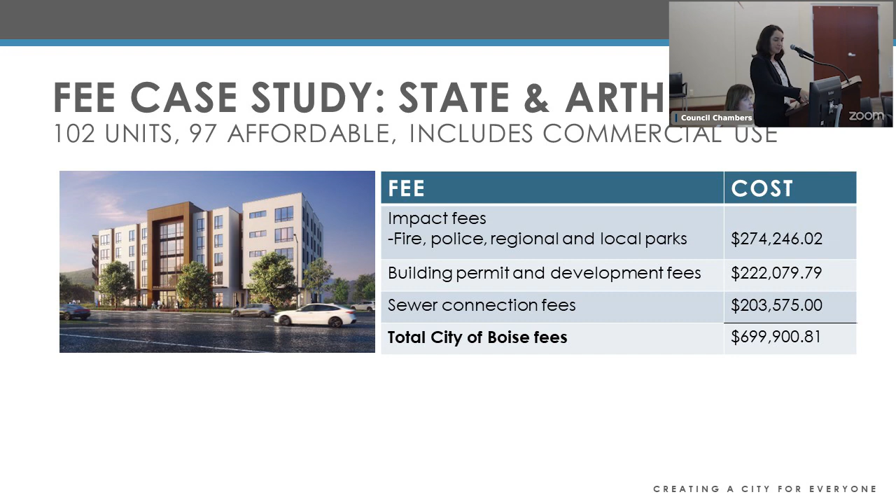So essentially what we have tried to devise here is a 2-tiered system with greater incentives associated with deeper levels of affordability. So we've got 2 categories of affordable housing projects. One is projects that meet the zoning code's affordability incentive criteria by having at least 25% of their units affordable at 80% AMI for rental, 120% AMI for homeownership.

So what we're essentially saying is, look, if you're meeting our zoning code affordability incentives, we can also offer you this short-term deferral on both your impact fees and your building permit and development fees, where we can defer them for 2 years. You can pay them at certificate of occupancy, and it addresses a little bit of that upfront pain.

The second tier is for more deeply affordable projects in which at least half of the units are affordable at 60% AMI or below for rental or 100% AMI or below for homeownership.

So for these more deeply affordable projects, they would be eligible for their building permit and development fees to be exempted altogether, meaning that there would be no expectation that they be paid back in the future. And with the ordinance change before you, those types of projects would also be eligible for a long-term deferral of their sewer connection fees, which we'll get into now.

So currently under city code, restaurants and breweries already have the ability to have their sewer connection fees deferred. This would just add affordable housing as an allowable category and would also include a repayment structure that's specific to the financing needs of those projects.

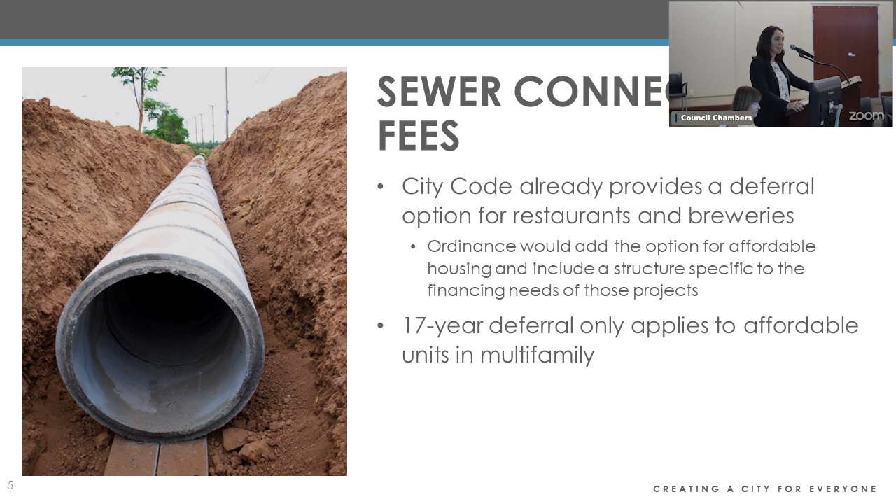Madam Mayor, first of all, Nikki, great job explaining the complicated thing without any slide assistance. You did wonderful. You had said something about folks being eligible for an exemption, and I was wondering if you could maybe just give us a snapshot of what that process would look like. Is it somebody who meets the requirements and then they apply for something, and then we have an objective way of saying yes, no? How does the eligibility work?

Mayor, Council President Hallyburton, yes, that's exactly how it would work. We would have very clear criteria spelled out in policy. And this is something we're excited about. There is a position within PDS, it's Joe Bruce, and his job is very much to work with folks who are trying to bring affordable housing online and to make sure they're aware of these incentives that are out there. Here's how we can get you through this application process, right? Here's what the criteria will be. And if you meet the criteria and you apply and we verify that you meet the criteria, then you would be able to get that exemption or deferral.

Perfect. That's how it would work.

Madam Mayor, not a question, but just a comment. I really appreciate the continued focus on trying to come up with creative solutions to ensure that we have affordable housing. We know the market forces right now across the nation, but here in Idaho and in Boise specifically are really putting a damper on our ability to make this happen. So I'm really just thankful that the team is continuing to look at the many different options we have in front of us. And I think that this is another one of those levers that we can pull that hopefully gets that kind of development here. Thank you.

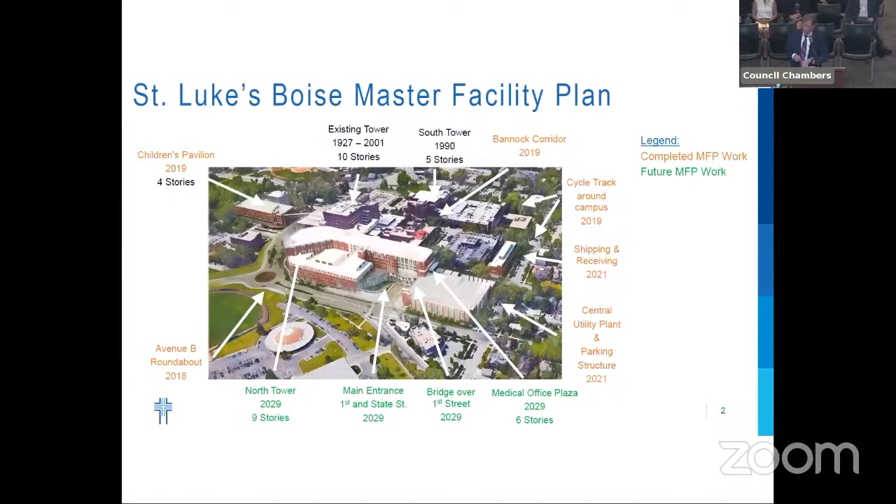I'll go to the next slide. Just for some macro context, it's important to share that St. Luke's Health System is Idaho's largest private employer with over 15,000 employees. We provide care at hospitals and clinics throughout Idaho and eastern Oregon. The medical center downtown is a tertiary referral hospital and the only children's hospital within the state of Idaho. We have 400 beds, 113 children's beds, and our beds have become often full. Annually, we admit over 21,000 patients, including 2,000 pediatric admissions from all areas of Idaho and beyond, for cancer services, cardiac services, and trauma care.

We average more than 100 patients per day in the emergency department. When the pediatric trauma service opened in 2022, we quickly saw an uptick of 9,000 pediatric trauma patients in 2022 alone. Ever more important in light of the bus incident back on August 1st, having these services locally in this community is a critical asset. In addition to providing healthcare services, St. Luke's Health System and the Boise Hospital is an important economic engine within the state of Idaho. The Boise Hospital employs over 3,600 community members at an average wage that is 60% higher than the state's average wage.

Next slide, please. Now, talking about demand for care, Idaho is one of the fastest growing states in the country. Within our communities of service, the population is growing fast. By 2034, 18% growth is expected. The population is also aging faster, with 37% growth in the 60-plus population, the high utilizers of healthcare services. It's a data point, but I think we can all relate to it relative to our personal experiences, commute times, reservations, and the costs we're incurring.

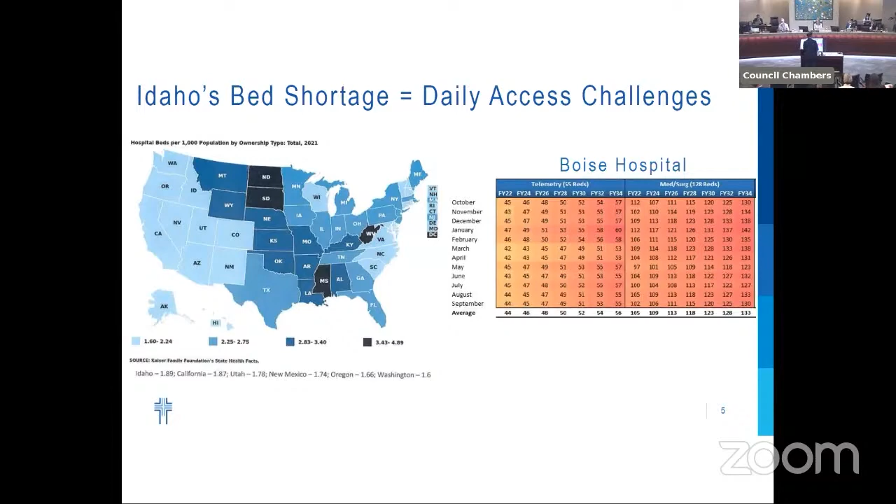From 1927 through 2001, we're at a point where we have aging infrastructure that prohibits growth in place. We have operating rooms that are below grade and often flood. We have ORs that are landlocked. We cannot accommodate the growth we're seeing. We have inadequate ceiling heights within those operating rooms, so we can't accommodate increased technology such as robotics for minimally invasive surgery. We have inpatient rooms that are not able to fit needed equipment, such as overhead lifts for our staff safety. We also have 72 beds that are no longer meeting code, which we have to bring up to code or put out of service as we look at additional construction activity.

In 2021, we completed our first phase of the master facility plan, shown in red, orange, blue, and green. That's the new central utility plant with updated generators, heating, ventilation, air conditioning systems, electrical power, and critical environmental stewardship takeaways.

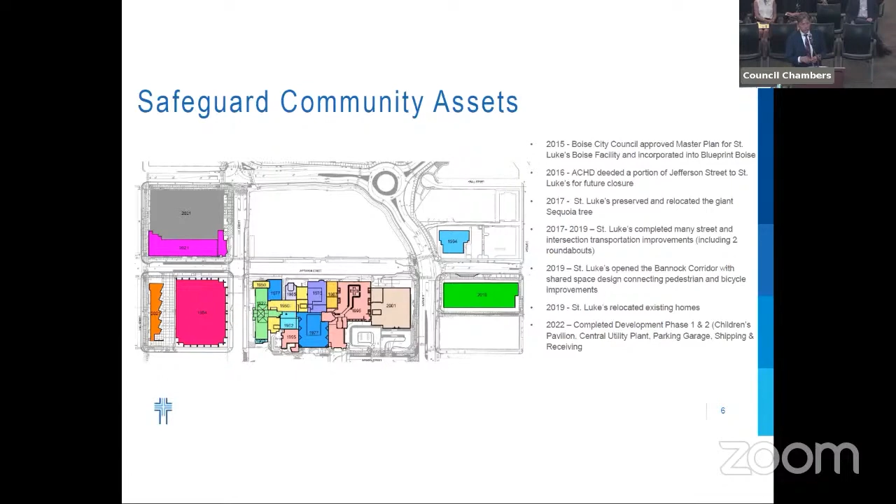We reduced our utility spend in electricity by 21% per square foot, gas by 26%, and sewer by 31%. We also added additional parking, shipping, and receiving, and pulled a lot of delivery activity off the main roads onto off-road loading and delivery docks. Next slide, please.

So what you see here is a completed campus shaped by years of planning and investment. In terms of the view, you can see First Street, State Street, and coming around Fort if you were to make that left turn. Design principles protect community access to care, ensure patient continuity, reduce friction, and improve clinical efficiency. We accomplish this through an integrated design that connects physician offices to diagnostic ancillary services, procedural, and inpatient care.

During our design sessions, it was a critical physician ask to ensure horizontally connecting access for patients and care teams. The bridge connects the existing tower to the new tower, similar to what we see in pediatrics. This responds to the community need by adding 80 additional beds. It also adds additional surgical capacity with 7 additional ORs and 2 additional procedural areas. Next slide, please.

So our next steps in terms of moving forward, I'll just pause and say this has been an extremely busy year with dozens of clinical teams engaged in design. The size of the rooms, the location of the equipment - we mocked up and did walkthroughs of patient rooms and operating rooms to ensure we had it right. That was in advance of working through our construction documents.

Listed here are the major milestones. The next spend is about $30 million, listed in the make-ready projects. Everything from our floodplain redesignation, because we have an opportunity for a letter of map revision relative to the neighborhood there, to a move of the ambulance entrance, establishing a construction yard for the activity, and north wing reinforcements.

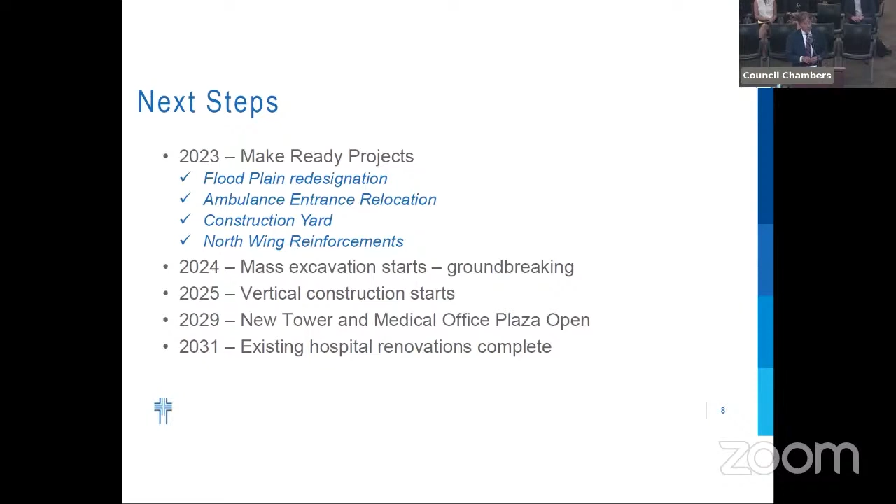In '24, we'll look at the big dig, when mass excavation starts. Then in '25, you'll start to see the skeleton of the building rise. This is by no means a small project, multiple years that will require working closely with the city, the neighborhood, ACHD, as well as our caregiver teams.

In conclusion, we're committed to a partnership with the city of Boise. We look forward to continuing to provide high-level services to the community here. I will stand for any questions before I turn it over to Kristen Lohse.

Madam Mayor, thank you, really detailed presentation. I just wanted to make sure I understood, with this new build and the numbers we're seeing with growth in Boise, how close will we be in terms of the number of beds to meet the demand? Will we be at that 75% level or higher than that?

It's a great question. Our planning horizon was 2034, so that is one challenge we have—we're bumping up closer to that planning horizon than we thought we would. We have three shelled floors, so we'll be able to add additional beds if demand is there. But it's important to share that this is an and strategy. Acute care services are not the only solution to pulling down the demand for inpatient care. A primary care strategy, remote patient management, offering telehealth—those are all critical strategies we have to embrace as well.

Madam Mayor, first of all, I want to say sorry to your entire team. I heard the news about Joanne earlier today, and it's heartbreaking. I'm sure you're all hurting, and I do appreciate you all being here and continuing to move forward.

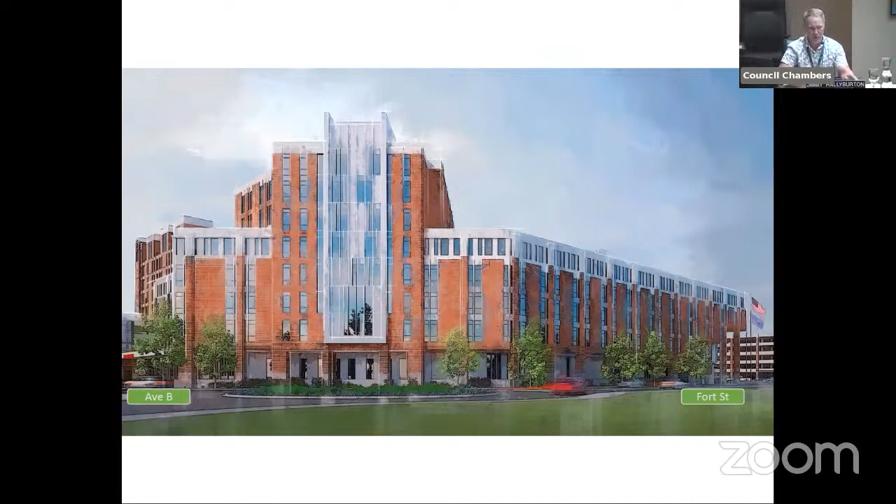When you get to the big dig phase, as you called it, do we anticipate closures on State Street or long-term closures of any roads surrounding St. Luke's? Madam Mayor, Council President Hallyburton, we anticipate using Jefferson in our current area in order to do that dig, so we do not anticipate closing State Street. We will have to close Jefferson for parts of the time when doing some of the construction, but we are not planning on closing State.

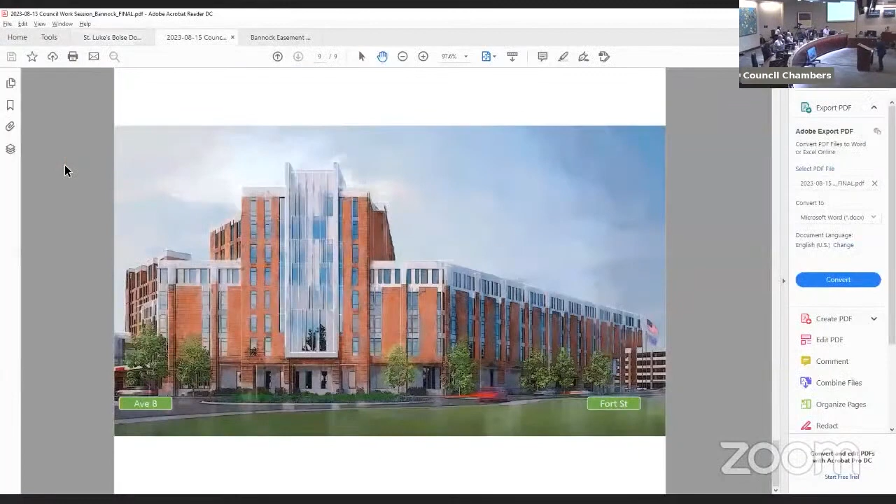Okay, thank you. Yes, sir. Okay, thank you, Chris. Right, can you hear me all right? Yes, all right.

Madam Mayor and council members, I am pleased to be here with you to share the results of the Bannock corridor testing. And this is what I'm going to cover.

Next slide, please. This is what I'm going to cover. I'm going to do a quick introduction, talk about shared street design, and the testing summary and results. Next slide. Also, Jessica's happy to do the slides, but there's a little clicker right there—if that's easier for you. Perfect, okay, thank you. Should have said that earlier. Sorry, Dennis. Never mind, it's not working today. Oh, okay, sorry.

All right, thank you. So Toole Design is a national firm specializing in the design of streets for bicycles and pedestrians. As an urban designer, these are the kind of projects I specialize in, ones with a big focus on user experience—projects that marry civil engineering with placemaking. I'm also the co-author of the original design guidance for shared streets. This image on the right is the FHWA guide for accessible shared streets. So all that to say, we come with credentials in engineering, planning, and urban design.

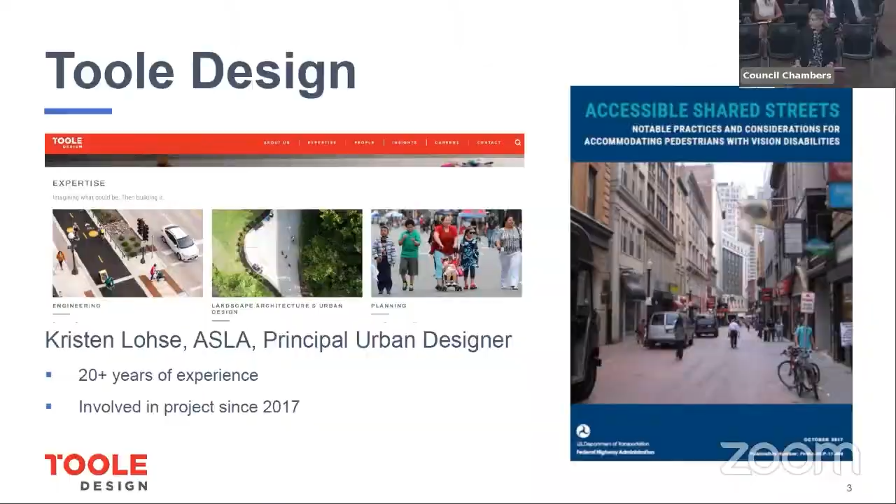I have been on this project since 2017, so six years, and my engagement has been in three distinct phases. The first phase was from 2017 to 2019, a community engagement phase. After that letter agreement, we built consensus about how Bannock could look and function. Following that, I worked on the concept design with the community and the council, and was involved in the council resolution. Toole Design did the 30% design of the corridor; we turned it over to the Land Group, who did the final design and construction. Then we began the testing, which was a multi-year effort. Throughout that whole process, there has been engagement all along, working with the community, the council, and the mayor.

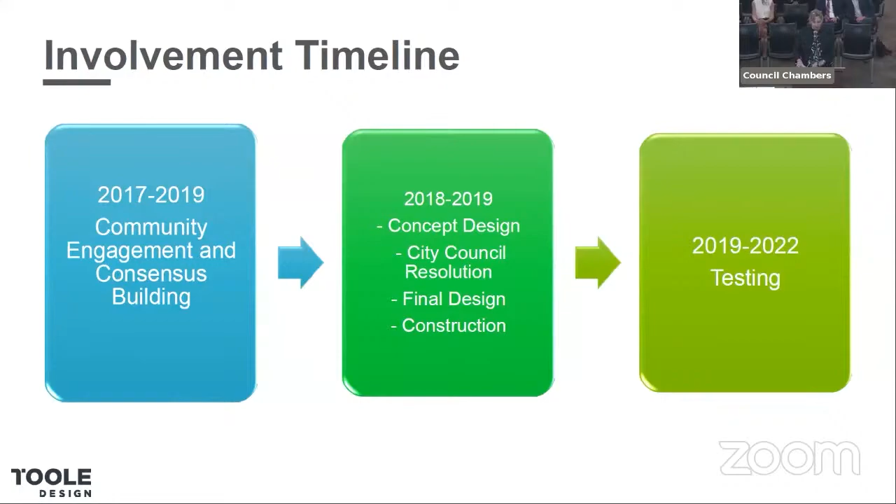I want to talk a bit about our shared street design approach to frame up the testing and results. This is a wonky slide, and I won't go into detail for the sake of time, but I want to emphasize that streets are designed to balance mobility and access. On this chart, a street that is really about mobility is a freeway.

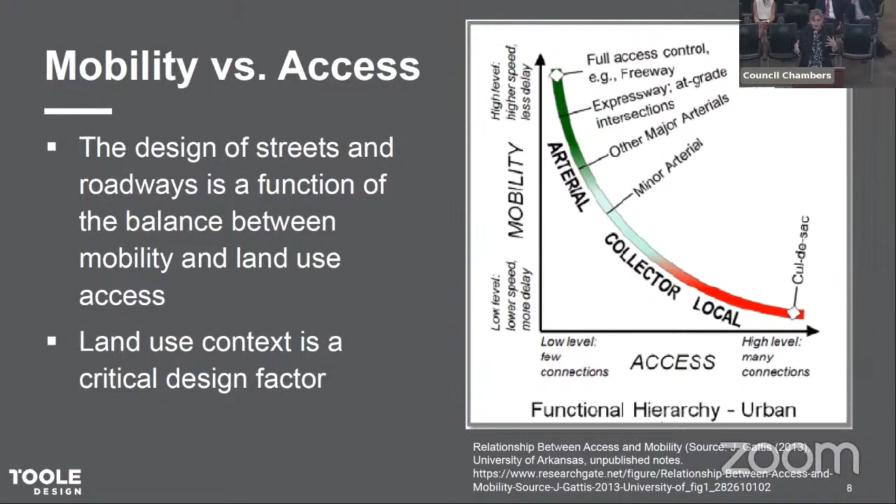It's just getting people from A to B. Streets that are really about access may be the street that you live on. It's mostly just homes, and it's really just for people who need to get to those spots. So every street is a balance of mobility and access. This is really important to this project in the way that Bannock is part of the larger street network for both bicycles, cars, and pedestrians.

With that mobility versus access lens, I want to walk you through some of the corridor context. First, looking at transportation: there are high comfort bikeways on parallel streets surrounding Bannock. This is a clip of the ACHD bike map, and you can see in blue and green those high comfort streets.

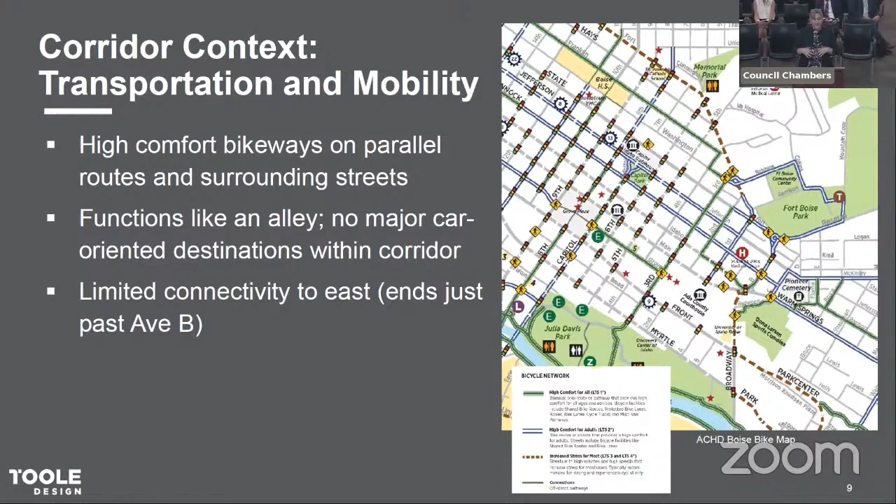For cars, Bannock really functions like an alley. There are actually no destinations for cars on that corridor. People do use it to go back and forth between parking areas and in other ways, but it's not a major street. Other surrounding streets are much faster and easier, more on that mobility spectrum. The street has limited connectivity to the east—it kind of dead ends just past Avenue B at the cemetery. So it's not a huge through street.

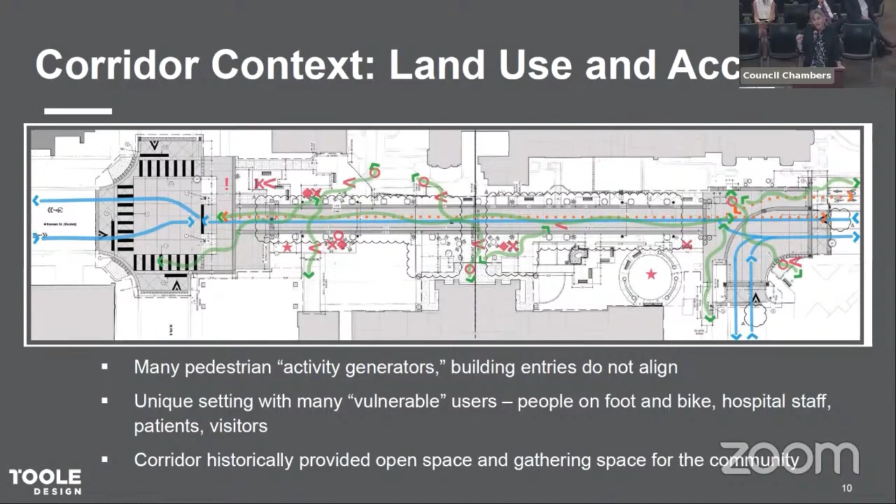So we let it be organic, which is in keeping with how shared streets are designed and intended to work. It's really important to recognize that this is a unique setting with vulnerable users—that's what we call people walking and biking. But that term is even more appropriate here given the context with the hospital. Finally, the corridor has historically provided open space and gathering areas for both the hospital and the community, and that was a really valued function.

For the reasons I just walked you through, we chose a shared street design. They're called pedestrian priority streets, though they go by different names. I pulled a few quotes from design guidance to emphasize that these are streets with high pedestrian volumes and low vehicle volumes, where you can reduce or discourage those volumes to emphasize pedestrian priority. They're really a response to making the street more friendly for people biking and walking. Cars can still go through, but they're part of a mix, and pedestrians are the priority.

Madam Mayor, I don't recall, but I can get that information to you.

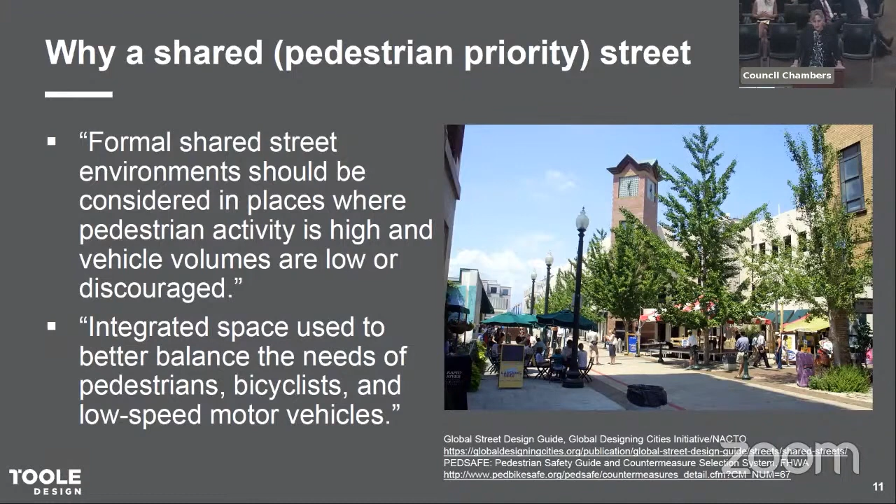This is a screen grab from the shared accessible street document I mentioned that we worked on. Shared streets work by removing all the segregation between modes, whether that's curbs that create sidewalks, or striping—everything is on one plane. You remove signs and traffic control, which forces people to interact, make eye contact, and engage with everyone. It's also important to indicate to cars that they need to travel slowly through this area, typically using gateway treatments, like the raised crossings at either end of this corridor, or other kinds of traffic calming.

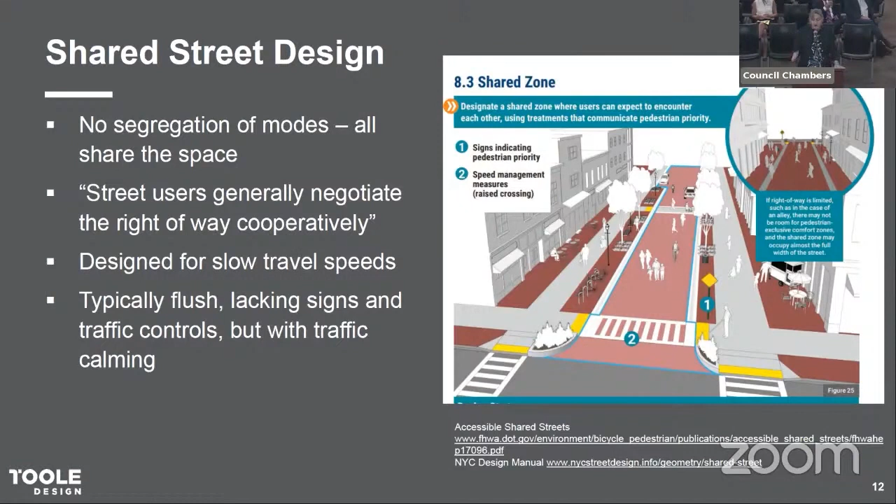So we'll move on to the testing summary and results.

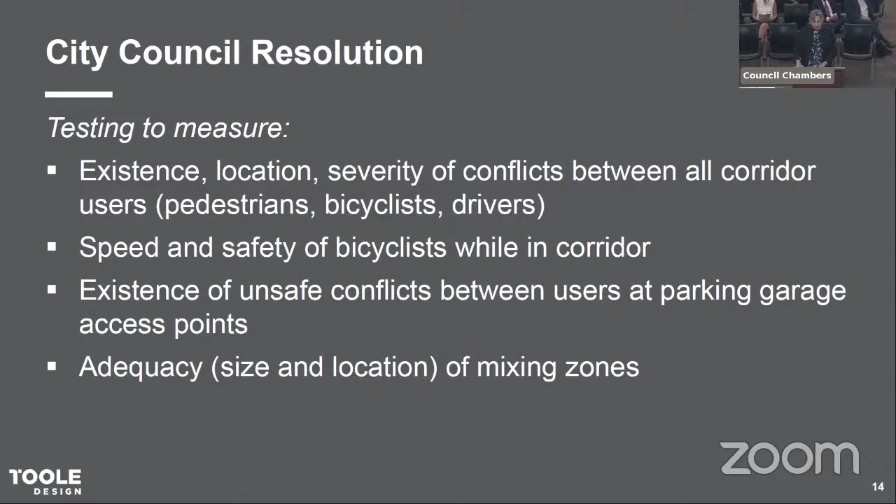The council resolution asked us to measure four things: the existence, location, and severity of conflicts between all corridor users, the speed and safety of bicyclists, the parking garage entries and what conflicts might occur there, and the mixing zones.

We know that data does not tell the whole story, so we designed a testing methodology that included the typical tools of transportation engineering: speed and volume data for cars and bikes, and incident and collision reports. We also used qualitative data.

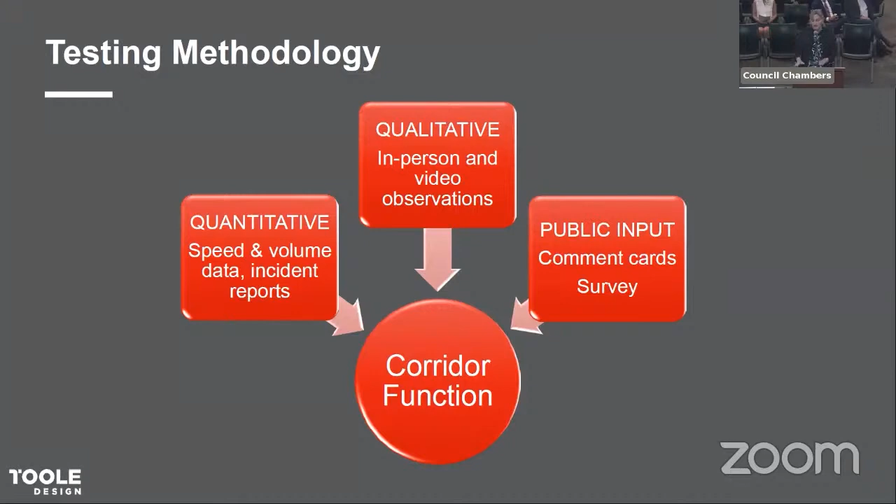We went out and observed the corridor, using video to see what was going on. But even qualitative data doesn't tell the whole story, so we knew public input would be critical. We developed comment cards and a survey. With these three things, we got a picture of how the corridor is functioning.

We had planned six observational visits intended to be within a year, with the sixth at the one-year mark. Some things happened between 2019 and now.

We were able to go out in differing weather conditions and activity levels. In response to our engagement with ENA, they asked us to extend the testing period, which we did, and we ended up extending it even longer than requested. They asked us to observe the corridor during Outlaw Field events, which we did, and we also did a temporary closure of Jefferson. So we did a lot of different kinds of visits in different conditions.

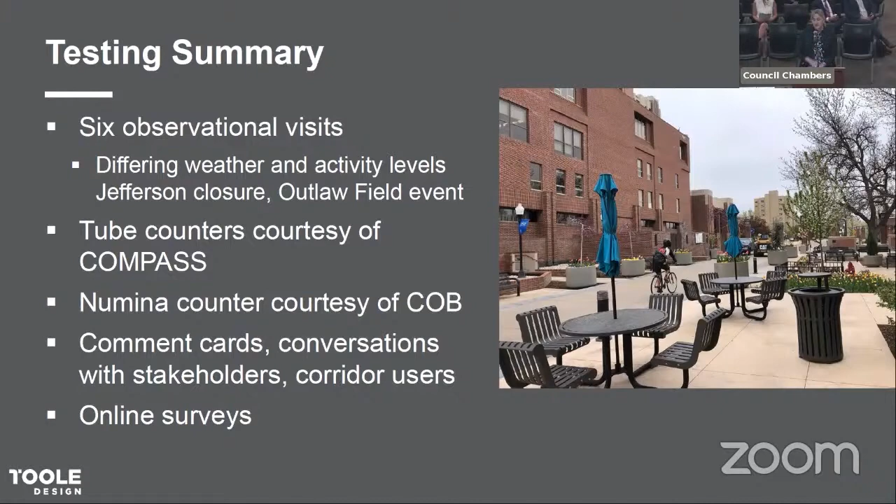We also worked with the city and COMPASS to employ count data. We had comment cards available on the corridor while observing and at other times, including in the hospital. We collected and compiled that data and analyzed it. The city of Boise hosted an online survey, and I believe ENA also hosted one.

What did we learn? We learned that pedestrians are the major user at almost 80%. At times there could be thousands of people using the corridor in one day—a steady trickle with big surges during shift changes. Drivers are about 17% of users, roughly 500 cars a day, and bikes are at 4%, about 50 users a day.

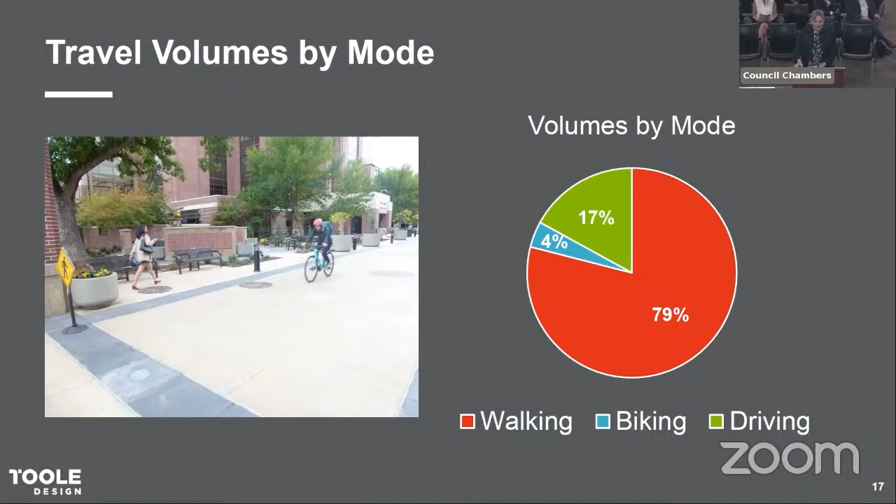We looked at travel both along and across the corridor. Most drivers do move slowly and yield to other users. That may shift over time as people become more comfortable using the corridor. Bike volumes are low and speeds are not a concern—they seem to work quite well in the corridor.

Speeding is not super prevalent, but it's always an issue on any street—there are always outliers. We haven't encountered extreme speeds, but there have been some higher speeds edging up over time, which is a concern. A car passing you at 12 miles an hour can feel really fast when you're walking along the corridor with no separation.

Do you have any sense of whether it's hospital guests, patrons, or through traffic driving through this? We did not do an origin and destination study to know who the users were. They did appear to be mostly regular folks in cars, with very few delivery vehicles.

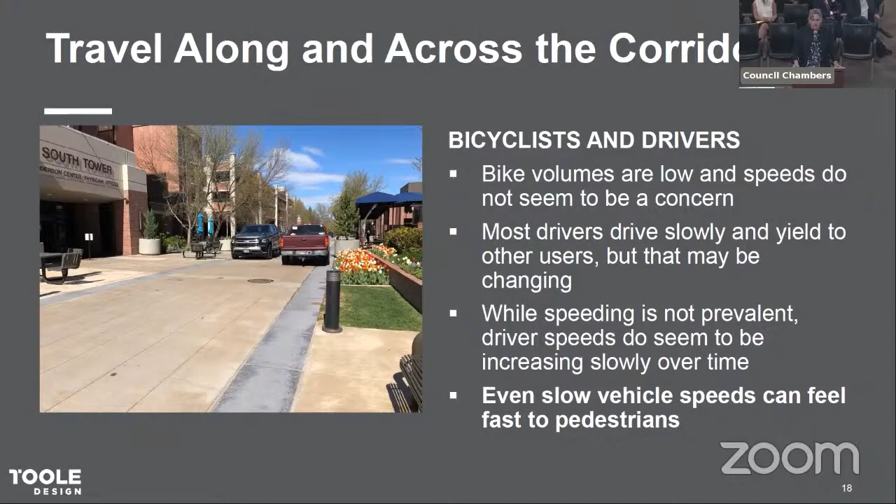Pedestrians traveling along and across the corridor—this has been an evolution. Despite other shared streets in Boise, they all look and feel different and operate differently. People at first were quite confused and didn't know they needed to yield to cars, so there was a lot of confusion and lack of caution. Over time, people have gotten the hang of it and look out for cars more, but some discomfort with that disorganized movement remains.

That's kind of how it's supposed to work. People all need to be cautious. Finally, we know that the gathering spaces are well used, and people from our public comments have mentioned that they really appreciate them. Next slide.

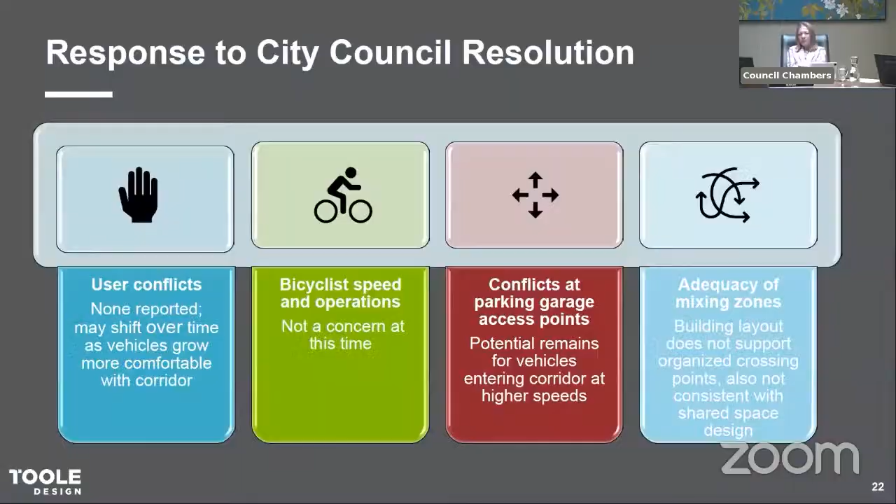Thank you, Madam Mayor. All right, wrapping up—here's how our testing shows the corridor performs in response to the council resolution. In terms of user conflicts, none have been reported. That may shift over time as vehicles grow more comfortable with the corridor or traffic patterns change, but right now it's not a concern. Bicyclist speeds and operations are also not a concern—they seem to be meshing well with all users.

Conflicts at the parking garage access points are a concern. The way the corridor is laid out, drivers enter right where people exit and enter the parking garage. So as people transition from the regular street to the shared street, they meet at a shift change—a surge of pedestrians coming out. But so far, no conflicts, though people need to continue to be aware, and if vehicle speeds increase over time that could become an issue, though it hasn't so much right now.

In terms of the adequacy of the mixing zones, we did not actually design mixing zones because it was too hard to organize people into one space, but it does seem to be working all right. We notice that people walk where there's available space—if there's nobody on the corridor, pedestrians spread out, but if there are other users like a car or bicyclist, pedestrians tend to move aside. That's true as people move across the corridor too. During shift changes, when there are lots of people, they just march right through; at other times they're more aware, slow, and observant. Next slide.

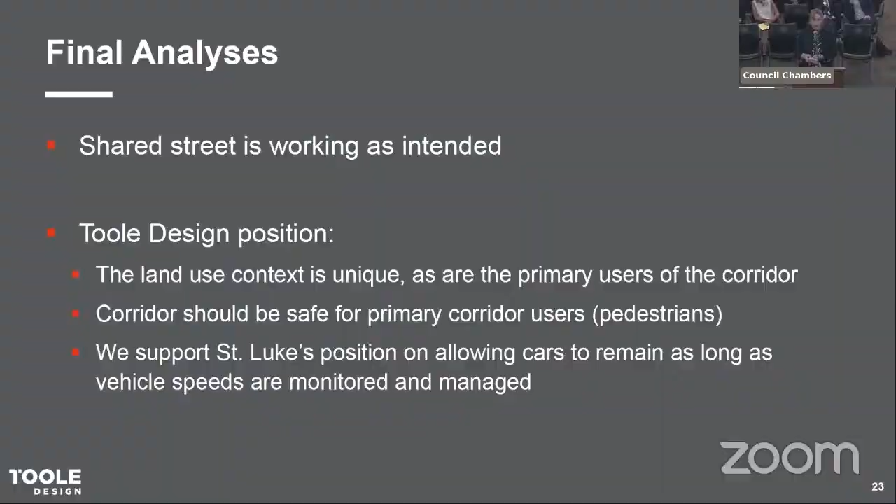Any questions for Kristen? Madam Mayor? Yes, I think I have three questions for you.

First, Jefferson's not closed yet. Do we think that has anything to do with a lower percentage of bicyclists going through, and might that change when Jefferson actually closes? Madam Mayor, Council President, we did a simulation of Jefferson being closed and did not notice a huge difference. That could be the case, but as I mentioned before, the cycle tracks as well as the streets really provide a more direct, fast route, and this is really just a half a block.

Second question, so maybe it's anecdotal. One of the things I've heard from people riding bikes is the crossing on Broadway or Avenue B kind of makes it a little weird, where it's a really sharp 90-degree turn. If you're a little kid, maybe you can do it, but that may be one of the issues as well. Did you get any response when doing surveys and checking in with folks, if that was an issue people had brought up?

Madam Mayor, Council President, do you mean where Bannock and Avenue B intersect? Yes, and that pedestrian crossing island. Yep, the crossing island. That's a tough spot. In an ideal world, that design would look different. We were involved in the design for that little segment of the cycle track between Avenue A and Avenue B, but that segment was not part of our observations, and we did not, to my knowledge, get any comments about that intersection. Thank you, I'm interested in looking into that, because as ACHD does their Bannock study, that creates a pathway from Bannock all the way over to 17th Street, almost all the way to the penitentiary. There may be some changes there.

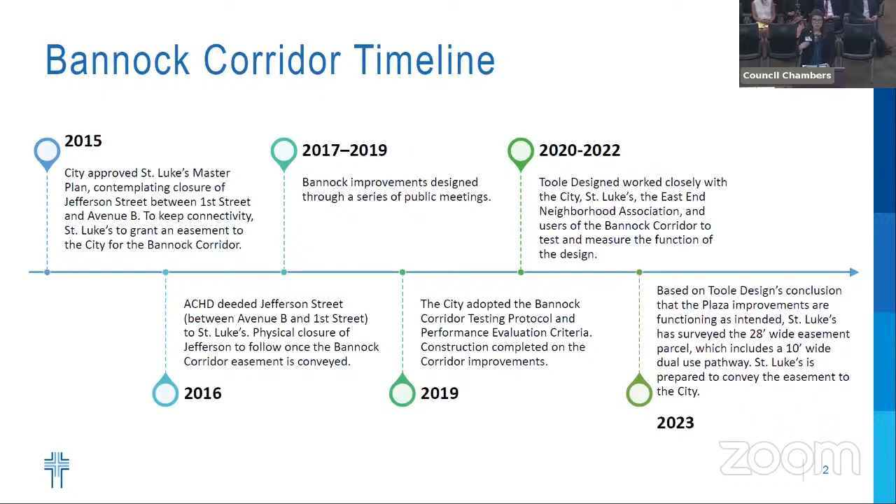Then it was applied, and for this period we've had the chance to test this for an even longer period than we initially intended. But we appreciate, as Kristen laid out, the work that Toole has done to apply rigorous testing protocols to the corridor to assess its use, and have taken the input that Toole Design has shared with St. Luke's about how the corridor could be improved, particularly given the multimodal use of transport. So that's all gone into the easement we're presenting today, and it incorporates that feedback and follows that plan. Next slide, please.

The easement we're presenting today is in response to the plan as adopted in Council Resolution, City's Resolution 284-19, which contemplated that St. Luke's and city staff would propose to the mayor and council an easement and final configuration for the corridor and the location of this 28-foot wide easement.

I want to note we are making some changes in light of the feedback from Toole. There had not been a posted speed limit, in service of encouraging all users to be aware of others and for no one user to have priority over another. But we did understand the feedback from Toole that, notwithstanding their preference or question as to whether there's necessarily a reason for cars to be in the corridor, if the city determines that's appropriate and we decide to proceed with that, here are the ways it can be done safely. So we've taken that feedback from Toole to add posted speed limits to keep speeds lower, and also to increase signage for awareness that this is a shared space for all users.

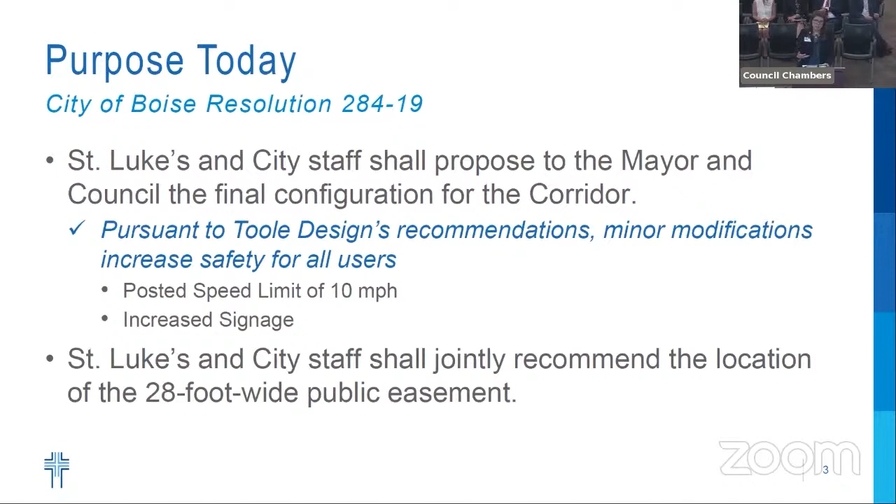Not all of those improvements were present during all of the testing. That's part of what's come out of the testing that we've added and are in the process of adding. Next slide, please.

The easement itself runs across approximately a 2-block span of Bannock, depicted here. It's 28 feet wide for the length of those 2 blocks. The whole easement runs from First Street to Avenue B, but for the portion between First Street and what was previously Avenue A, that's where the shared space is — a 10-foot wide portion specifically documented in the easement to designate that as shared use.

This easement provides and preserves that access in perpetuity, but St. Luke's maintains responsibility for maintaining the area, paying for snow removal and maintenance and so forth. The easement also requires St. Luke's to do that with materials in keeping with the documented configuration in this easement, of like materials or as good quality. So it really preserves that space, and I think the intent that arose from the public process in this document.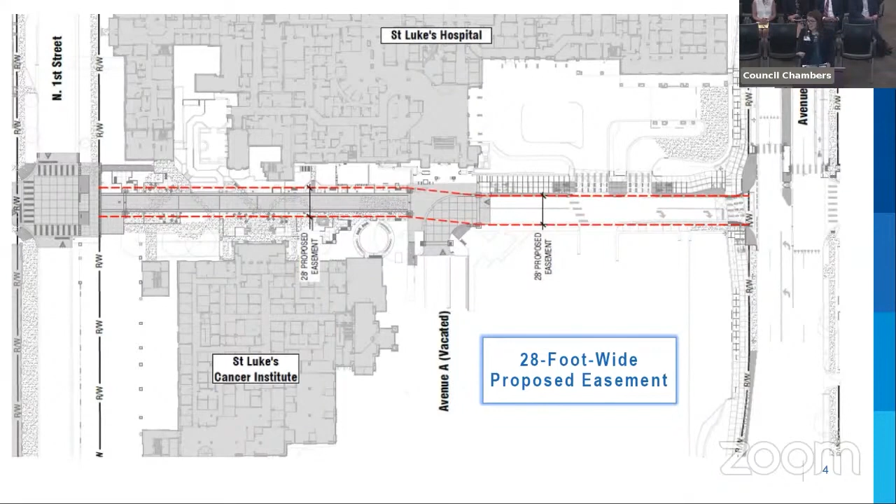This easement, as we've discussed, is the next step in St. Luke's investment in modernizing our hospital and really investing in this connected facility for the benefit of our community. And that's what we are, together with city staff, presenting to council today. Madam Mayor, with that, I stand for any questions.

Thanks, Jordan. Going to give everyone else a chance to go first. So I do have some questions for you.

With these proposed corridor improvements, is there a significant cost being invested into this, or is it sort of maintaining what it is right now with the addition of some signs? Is there actually a fair amount of construction going on to get it to this proposed easement design? St. Luke's has invested significant dollars in achieving the corridor that is there today. It's built, so there'll be ongoing maintenance to maintain that space and its condition, but the investment to build it has already been made. So other than maybe some additions to signs or slight traffic calming measures to reduce speeds, there's not an additional large amount of investment other than just maintenance of the space. That's correct. Great, thank you.

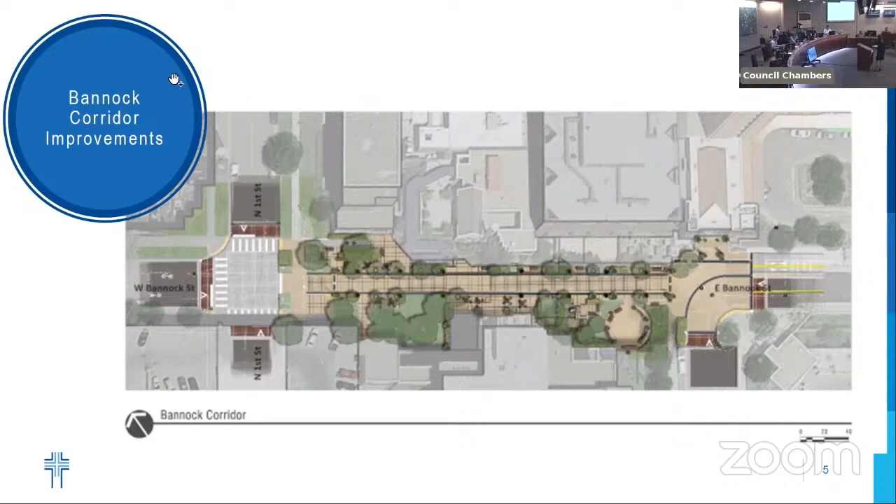Thank you very much. Thank you. I think that's it. I want to thank you all for coming in and for a great review of where we've been. Appreciate all the work that's gone into the development of the corridor as it is and as it's been over the last several years, and the easement agreements that you worked on with staff. Really appreciate it, and it's good to see you all here tonight. Thanks for being here.